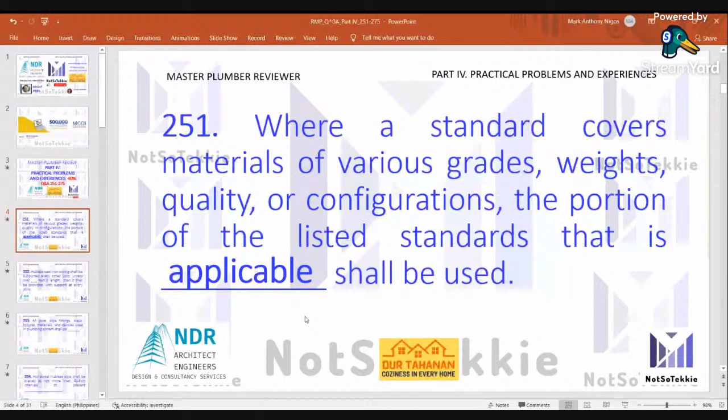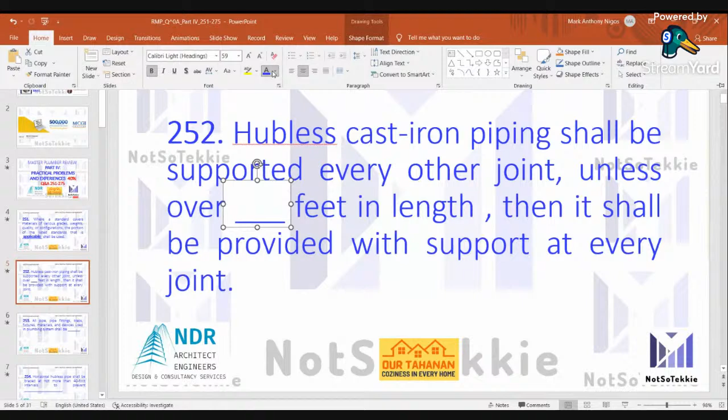252. Hubless cast iron piping shall be supported every other joint unless over blank feet in length, then it shall be provided with support at every joint. The answer is 4 feet. Hubless cast iron piping shall be supported every other joint unless over 4 feet in length, then it shall be provided with support at every joint.

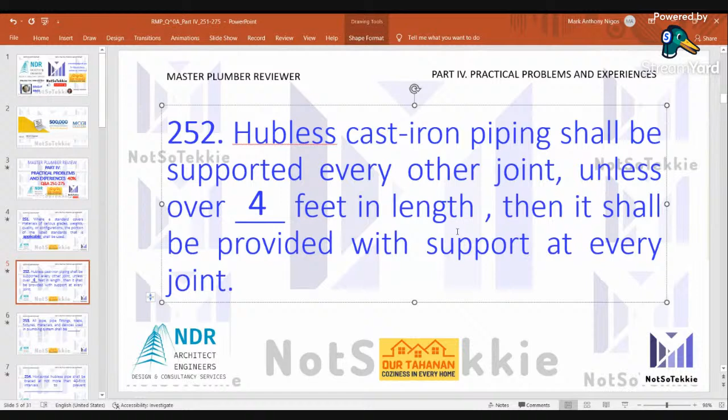253. All pipe fittings, traps, fixtures, materials, and devices used in plumbing system shall be blank. Answer is: shall be approved by authority having jurisdiction, listed or labeled by listing agency, free from defects, or all of the above. Ito yung option choices eh. All pipe fittings, traps, fixtures, materials, and devices used in plumbing system shall be approved by the authority having jurisdiction, listed or labeled by a listing agency, and free from defects.

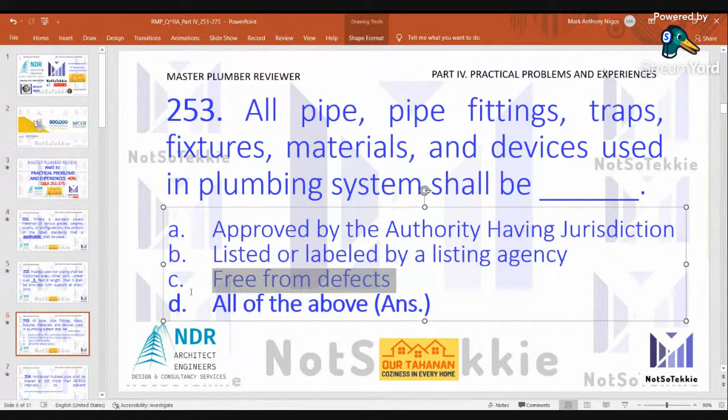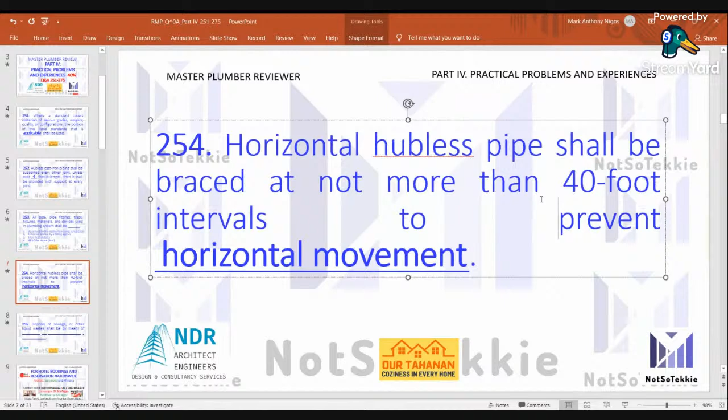254. Horizontal hubless pipe shall be braced at not more than 40-foot intervals to prevent what? The answer is horizontal movement. Of course, horizontal kasi siya, hindi siya vertical. Horizontal hubless pipe shall be braced at not more than 40-foot intervals to prevent horizontal movement.

255. Disposal of sewage or other liquid waste shall be by means of what? The answer is the drainage system of the building or premises. Disposal of sewage or other liquid waste shall be by means of the drainage system of the building or premises.

256 na tayo, tuloy tayo. 256. Piping in connection with a plumbing system shall be installed that the piping or connections will not be subject to undue strains or stress, and provision shall be made for blank. Madaming sagot yata, the answer is structural element, contraction, and expansion. Yan, all of these, ABC.

Siyempre, pero pag exam na, pipiliin natin ay D, all of the above. Piping in connection with the plumbing system shall be installed that the piping or connection will not be subject to undue strains or stress, and provisions shall be made for structural element, contraction, and expansion. All of the above. Okay.

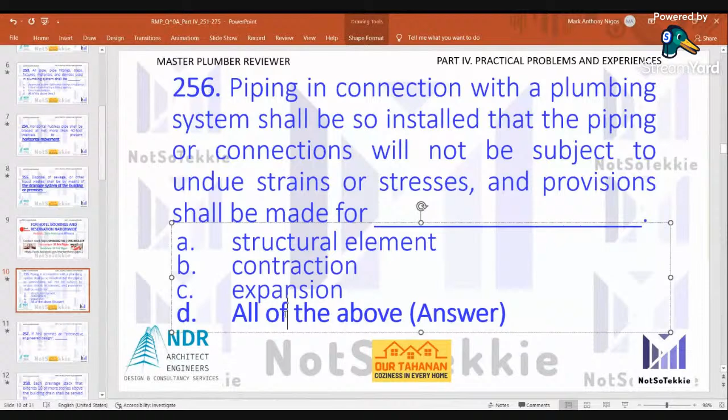257. If AHJ or authority having jurisdiction permits an alternative engineered design, what's the answer? The approval shall have no effect beyond the authority having jurisdiction boundary. If AHJ permits an alternative engineered design, the approval shall have no effect beyond the AHJ boundary.

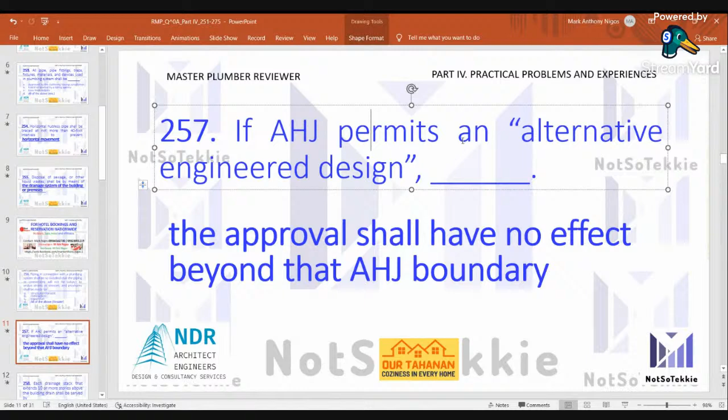258. Each drainage stack that extends 10 or more stories above the building drain shall be served by blank. The answer is a parallel vent stack. Each drainage stack that extends 10 or more stories above the building drain shall be served by a parallel vent stack.

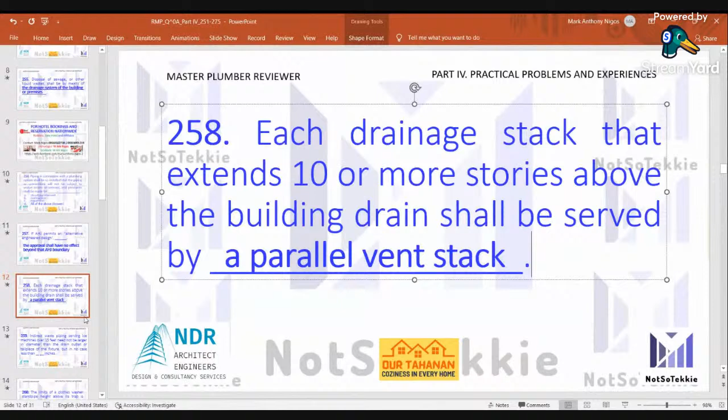259. Indirect waste piping serving ice machine over 15 feet need not be larger in diameter than the drain outlet or tailpiece of the fixture, but in no case less than blank inches. The answer is 3/4 inches. Indirect waste piping serving ice machine over 15 feet need not be larger in diameter than the drain outlet or tailpiece of the fixture, but in no case less than 3/4 inches.

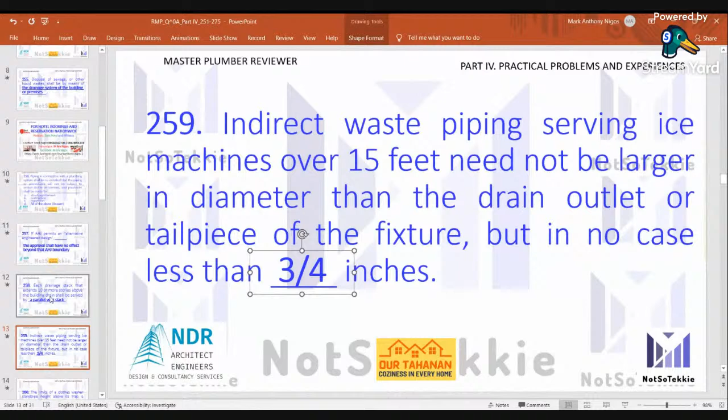Topic 260. The limits of a clothes washer standpipe height above its trap is blank inches. The answer is 18 to 30 inches. The limits of a clothes washer standpipe height above its trap is 18 to 30 inches.

Indirect waste pipe exceeding 5 feet in length shall be trapped. The answer is trap. Indirect waste pipes exceeding 5 feet in length shall be trapped.

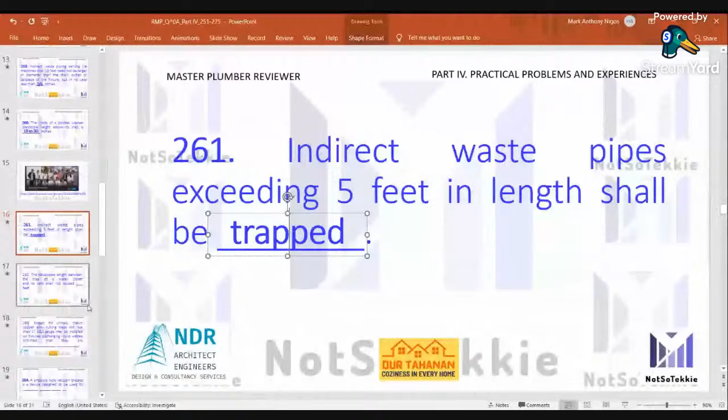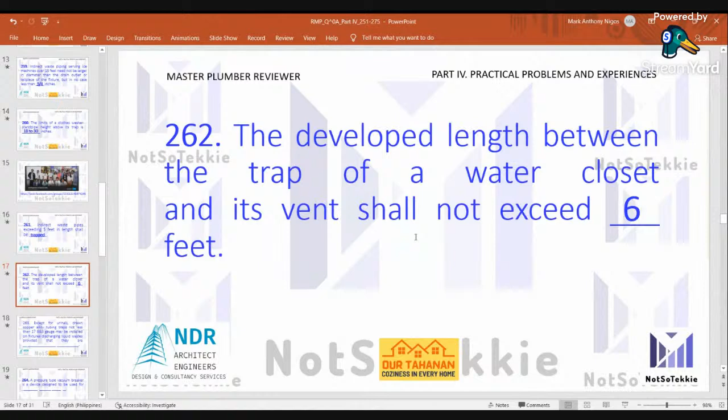262. The developed length between the trap of a water closet and its vent shall not exceed blank feet. The answer is 6 feet. The developed length between the trap of a water closet and its vent shall not exceed 6 feet.

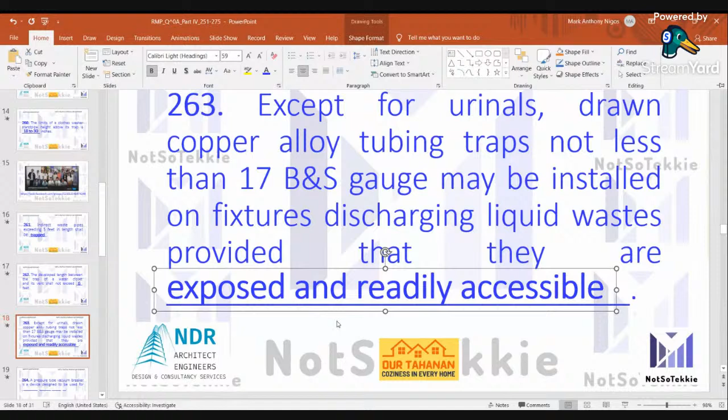263. Except for urinals, drawn copper alloy tubing traps not less than 17 B&S gauge may be installed on fixtures discharging liquid waste provided that they are blank. Answer is exposed and readily accessible. Except for urinals, drawn copper alloy tubing traps not less than 17 B&S may be installed on fixtures discharging liquid waste provided that they are exposed and readily accessible.

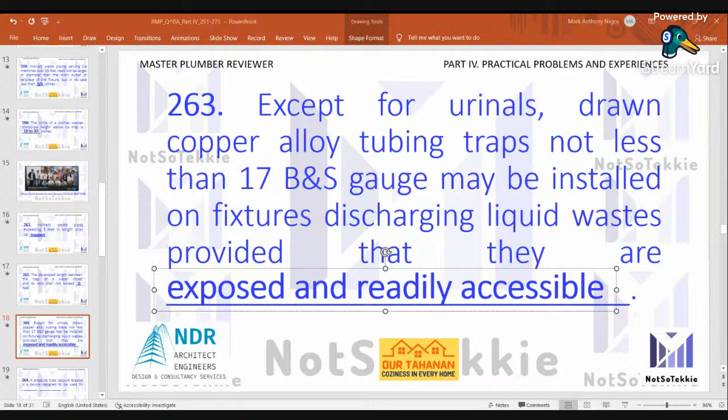264. Pressure type vacuum breaker is a device designed to be used for what? Answer is preventing back siphonage. Pressure type vacuum breaker is a device designed to be used for preventing back siphonage.

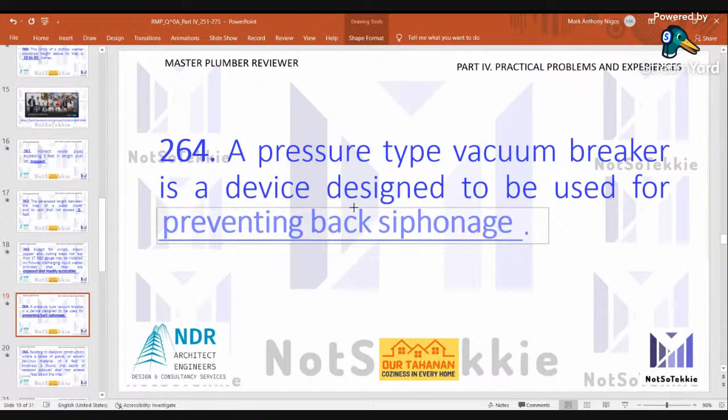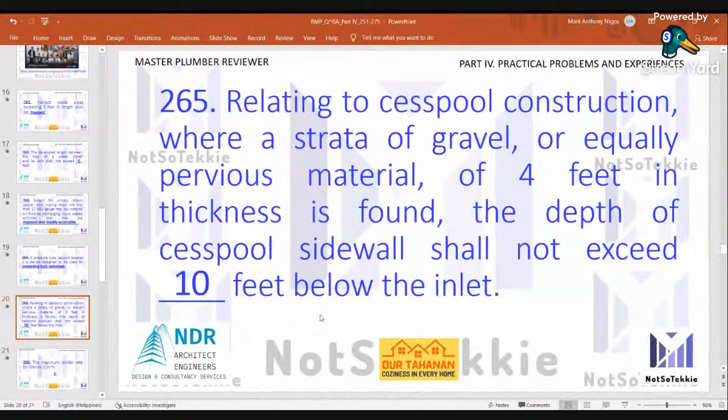265. Relating to cesspool construction, where a strata of gravel or equally pervious material of 4 feet in thickness is found, the depth of cesspool sidewall shall not exceed blank feet below the inlet. Answer is 10 feet. Relating to cesspool construction, where a strata of gravel or equally pervious material of 4 feet in thickness is found, the depth of cesspool sidewall shall not exceed 10 feet below the inlet.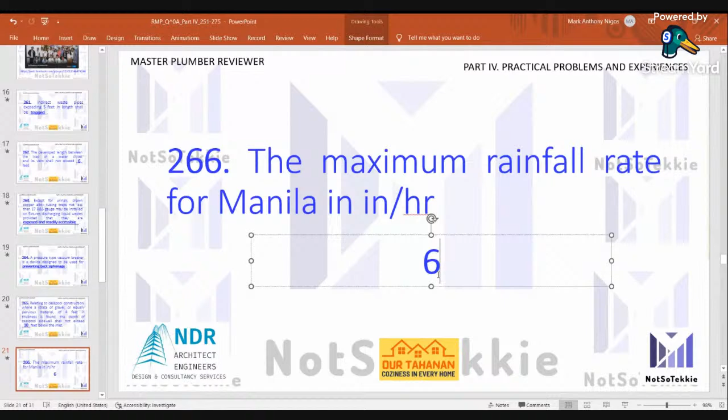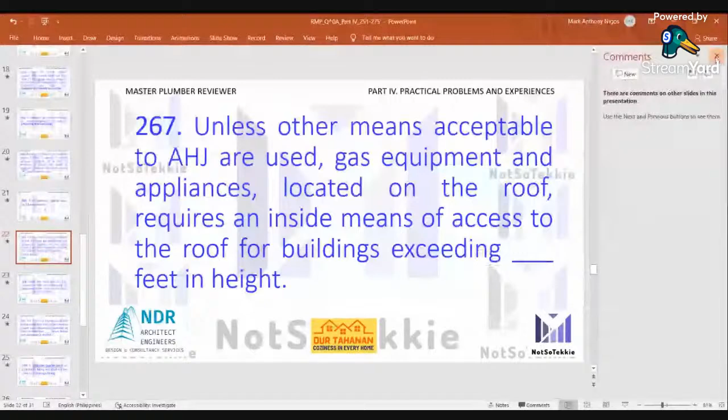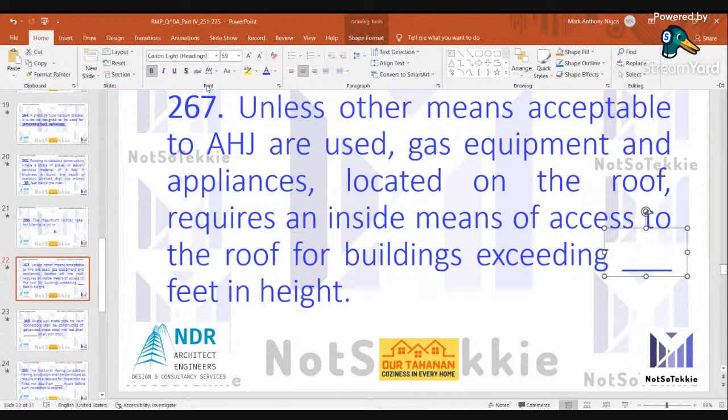267. Unless other means acceptable to AHJ are used, gas piping equipment and appliances located on the roof requires an inside means of access to the roof for buildings exceeding blank feet in height. Answer is 15 feet. Gas piping equipment and appliance located on the roof requires an inside means of access to the roof for buildings exceeding 15 feet in height.

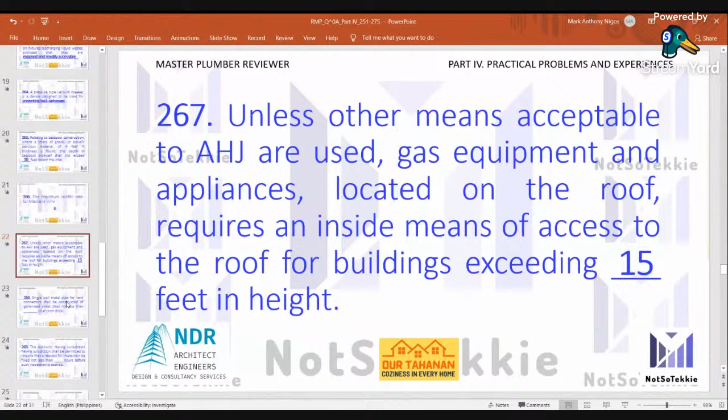268. Single wall metal pipe for vent connector shall be constructed of galvanized sheet steel not less than blank of an inch thick. Answer is 0.0304 of an inch. Single wall metal pipe for vent connector shall be constructed of galvanized sheet steel not less than 0.0304 of an inch.

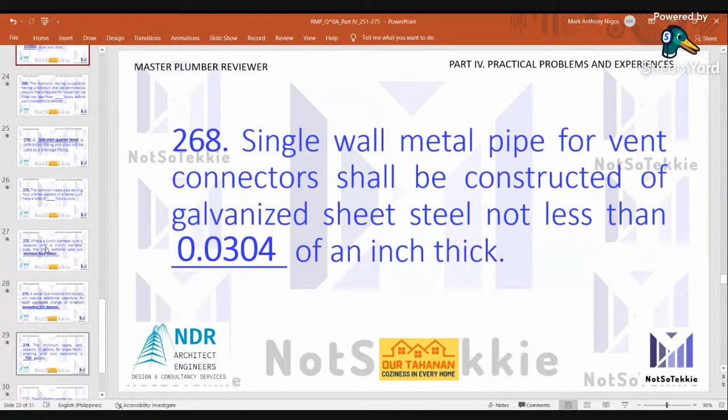269. The authority having jurisdiction shall be permitted to require a request for inspection be filed not less than blank hours before such inspection is desired. Answer is 24 hours. Authority having jurisdiction shall be permitted to require that a request for inspection be filed not less than 24 hours before such inspection is desired.

270. A side inlet quarter bend is a prohibited fitting and shall not be used as a drainage fitting. The answer is side inlet quarter bend. Side inlet quarter bend is prohibited fitting and shall not be used as a drainage fitting.

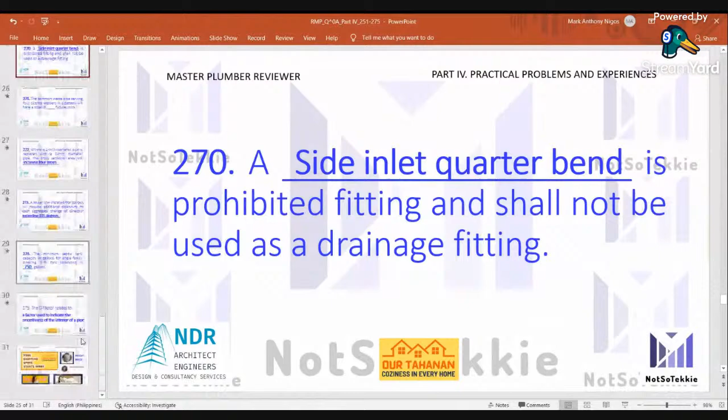270. Let's repeat that. Pasensya na kayo, let me show this. Sabi nga nila.

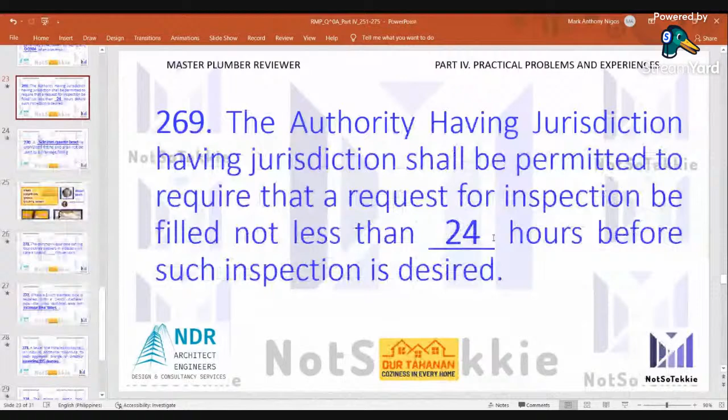Number 271. The answer is 24. 24 fixture units. The common waste pipe serving 4 clothes washers in a battery will have a total of 24 fixture units.

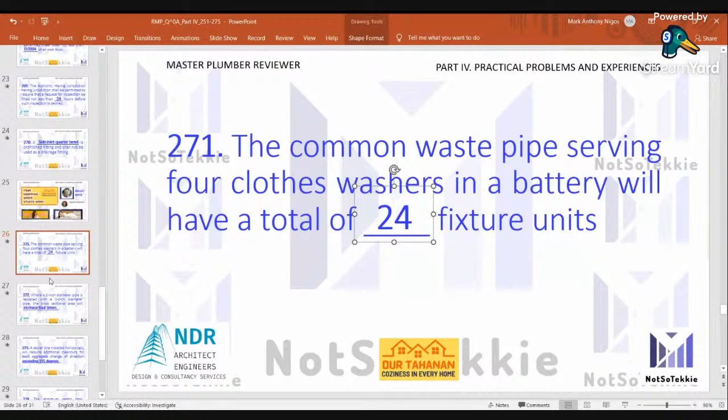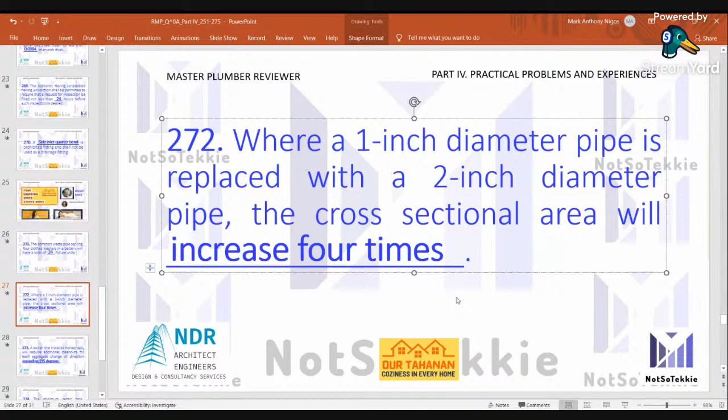272. Where a 1-inch diameter pipe is replaced with a 2-inch diameter pipe, the cross-sectional area will increase 4 times. So when the diameter is doubled, it increases 4 times. Where a 1-inch diameter pipe is replaced with a 2-inch diameter pipe, the cross-sectional area will increase 4 times.

273. Sewer lines installed horizontally will require additional cleanouts for each aggregate change of direction exceeding 135 degrees. So at 90 degrees it's fine, but once it reaches 135 degrees, additional cleanouts are added.

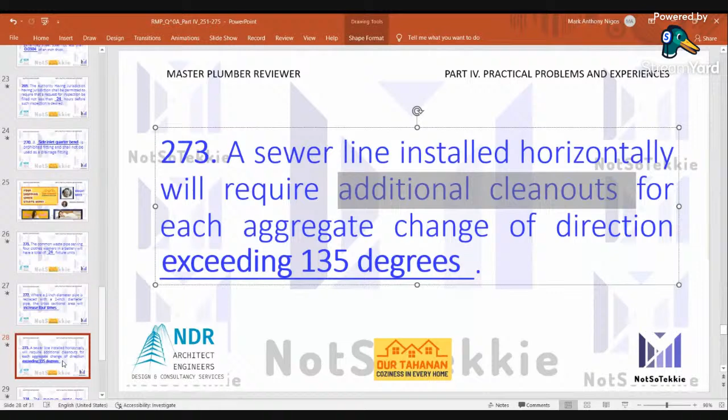274. Let's remember this. The minimum septic tank capacity in gallons for a single family dwelling with 2 bedrooms is 750 gallons. This is the English system, since in the board exam the metric system is used, but this is different because this is for Master Plumber. The minimum septic tank capacity in gallons for single family dwelling with 2 bedrooms is 750 gallons.

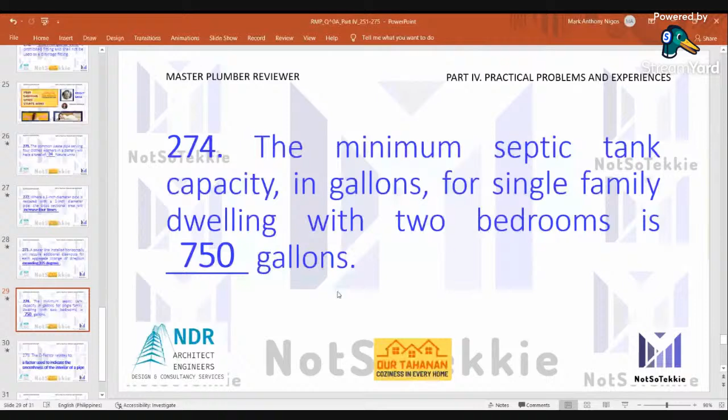And last question for this session. The C factor relates to a factor used to indicate the smoothness of the interior of a pipe.